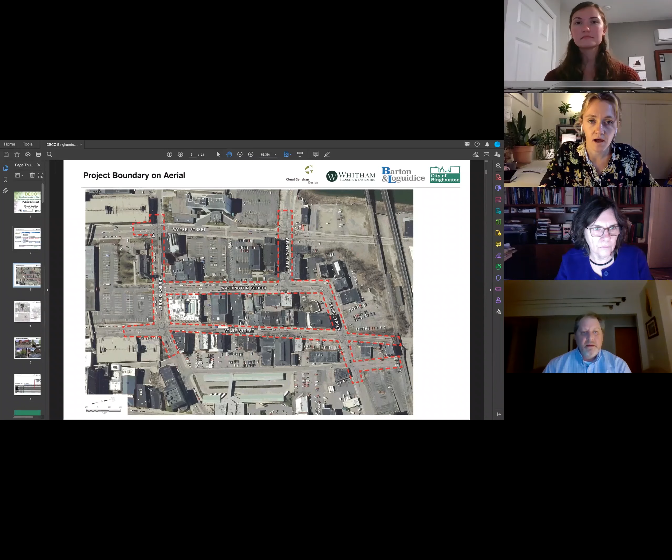So this diagram here shows the general project boundary. It's an area of downtown, and as we look at some of the diagrams that talk about the DECO district funding, it's really focused on the Forum as an anchor arts institution. This map shows where we're focusing our designs within the city street rights of way on State, Washington, Henry, a bit of Water, Clinton, Lewis, and Lewis Street, and Prospect Ave. So this gives you an idea of where these ideas are focused in plan view.

As we mentioned about the Greater Binghamton Fund, a bit of background is that in 2018 the state announced a funding opportunity for the Greater Binghamton area specifically. At that time, WPD helped prepare a lot of the planning documents. As we know, many of the arts organizations in the Greater Binghamton area are based in downtown Binghamton. There's also a wonderful scene that has evolved over the years with restaurants and other great initiatives happening downtown, so we're focused around the Forum area as a major arts institution.

During that time, a lot of ideas started to float around. We developed a number of graphics that caught people's attention. We worked closely with a lot of the project stakeholders, with the Forum and others. We had a stakeholder meeting then, and it led ultimately to a successful funding application.

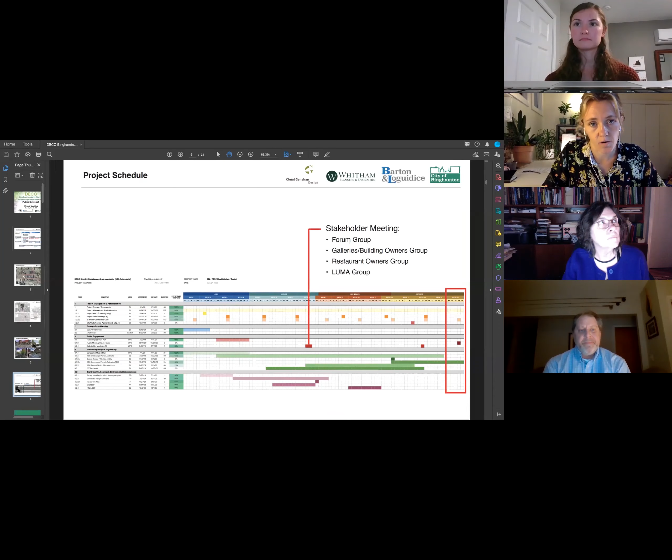For this project, we are at the end of our 4-month schematic design phase. This is an overview of where we've been since July of this year. Midway through, we had a few stakeholder workshops with the Forum again, a lot of the restaurant owners, the gallery and building owners in the district, as well as LUMA, to talk about where our ideas should go. And that was before we put out the survey for all of you to respond to.

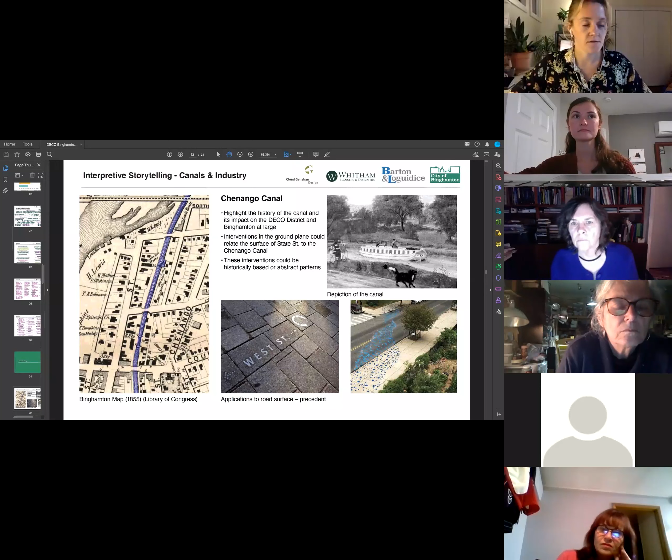A little bit more about that. There used to be a canal on State Street that was later filled. So a lot of history there.

So the next several slides will dive into the details of these plans, and we'll start from the ground up.

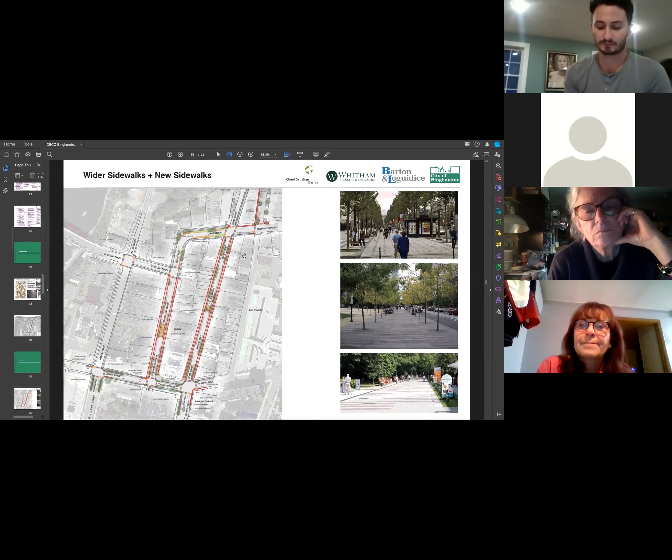One of the fundamental things we're thinking about is creating more public space in the district, by widening sidewalks and adding sidewalks within the street rights of way. This strategy is employed on the State Street and Washington Street corridors, and there's a new sidewalk added on Prospect Ave. All of this allows for the many uses public space can have and enhances walkability throughout the district, so events like First Friday and many others would be much enhanced by having more outdoor space.

Thinking about the gateways themselves and the curb bump outs, as well as the painted crosswalks. Curb bump outs help calm traffic and announce that you've arrived in the district, so we're narrowing the street at those intersections where we can. For the crosswalks, we're painting in between the lines with a color palette that will be cohesive throughout the district, so these artful elements will tell you that you've arrived at this place.

Thinking about traffic calming even more, we have two mid-block crossings that are raised curbs, raised crossings, so there will be a slight bump as a car goes along, which reinforces the idea of slowing down. But for pedestrians, it'll be at the same elevation as the sidewalk, so the crossing itself will feel more like a plaza to get you from one side of the street to the other.

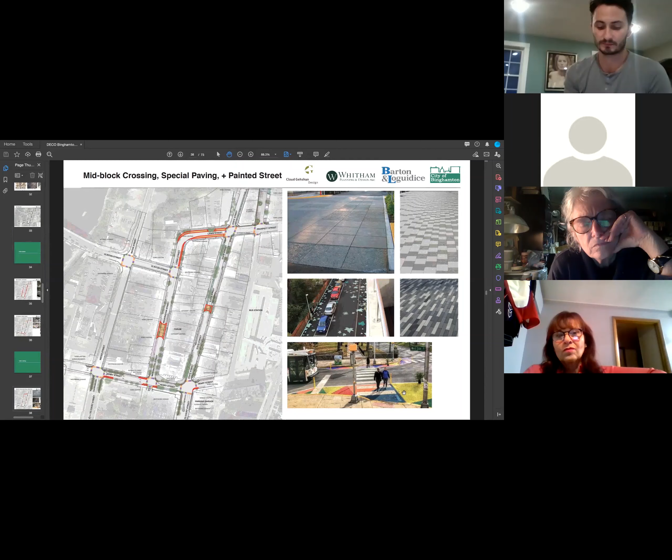And thinking about some special paving at the curb bump outs near the mid-block crossings.

There are a number of strategies for public plantings, the most significant of which are new street trees in the district. During one of our first site visits, we were joking as landscape architects that there's only about 10 trees in this district. Then we counted, and there are only about 10 trees in the district. So this design calls for a diversity of tree species, in case any blight might happen, so it doesn't knock out all of the trees. It's a really good way to think about the ecology of the city.

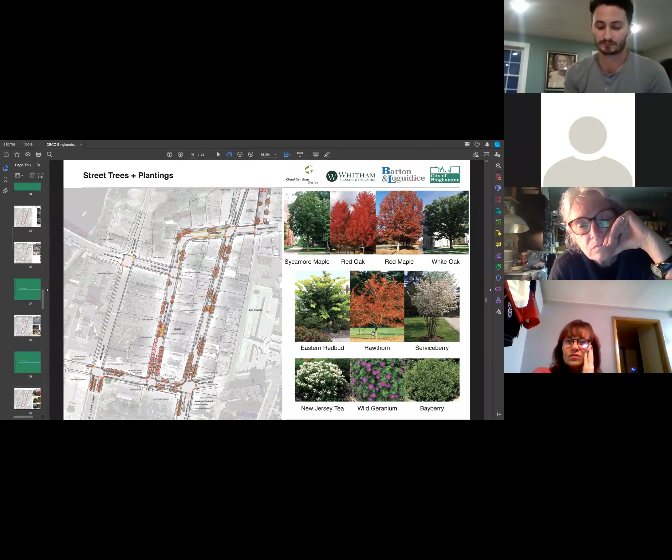So we have these canopy trees that are shown here, and smaller trees where there are overhead wires or in between, that are more ornamental. Some, like hawthorn, retain their berries and look nice during the winter. We also have shrubs, flowers, and other perennials in some spaces.

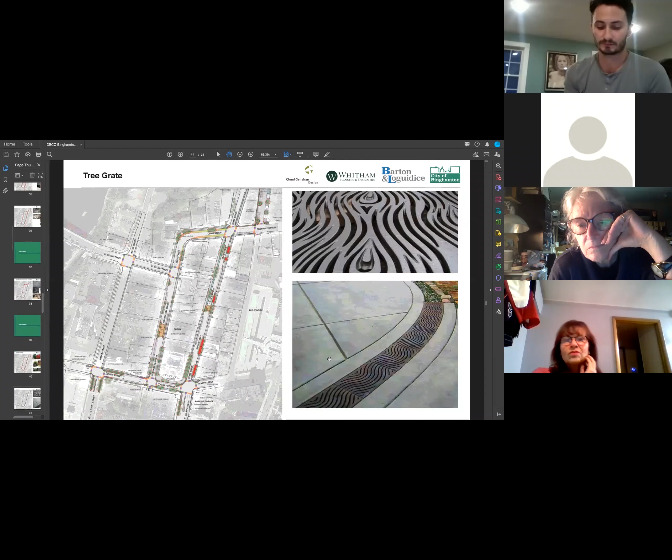For the tree grates on State Street, for those same street trees, we're thinking about this water pattern that visually recalls the idea of the canal on State Street and also celebrates the idea of infrastructure.

Another way we're doing that, and we're still figuring out the exact locations of the green infrastructure, but on the State Street corridor in particular, we're thinking about how we can do green infrastructure plantings that will help with stormwater and bring a lot of green and visual interest throughout the year. Plantings between cars and pedestrian areas help with safety, and we've got a number of species that look good throughout the year and relate to the color palette, with oranges and purples as well as greens for a cohesive palette.

One more point on this: we also have some green infrastructure on Henry Street here, as well as Prospect Ave, going down toward the railroad tracks.

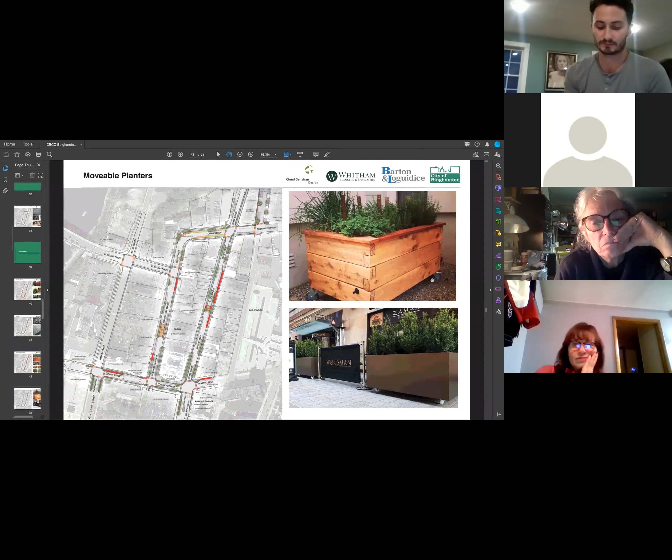Movable planters are a strategy that's easy to do. We've seen some already in the district. As seen here, they can be on casters, so they can be moved in place when we need them. We're thinking about restaurant owners, building owners, gallery owners as potential sponsors of these, creating a network of movable planters that can be moved out to claim a parking space or two for an event, then moved back during winter or when the event has passed. We're thinking about wood or metal for those materials.

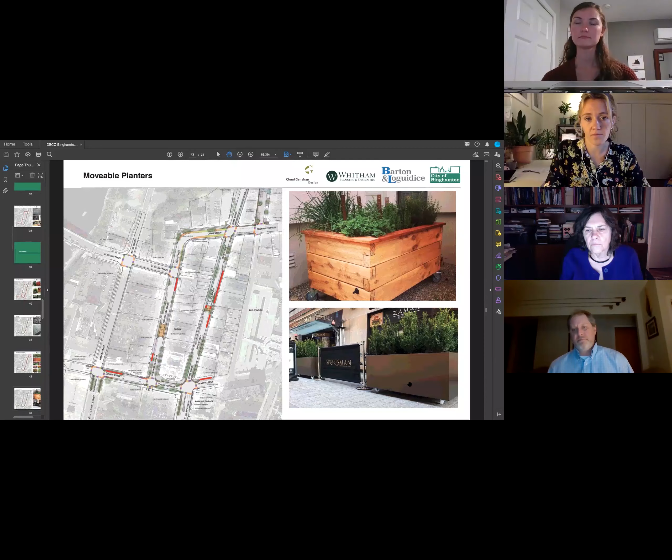Furnishings in the district—they're so small in the plans, so these are blow-ups—but the outdoor benches are focused on the southern side of this segment of Washington Street near the Forum entrance and the intersection with Henry Street, as well as the State Street area in the middle of the street and the north side.

These benches are the same product being used on the Washington Street Mall that's being redesigned and will be constructed soon, which helps lend a cohesive furnishing palette with the rest of downtown. It comes in these hot, beautiful colors, and there are a lot of different ways we can configure them, with backrests or armrests that are comfortable, and we can use these angles to put them together, which creates nice little pockets for conversation.

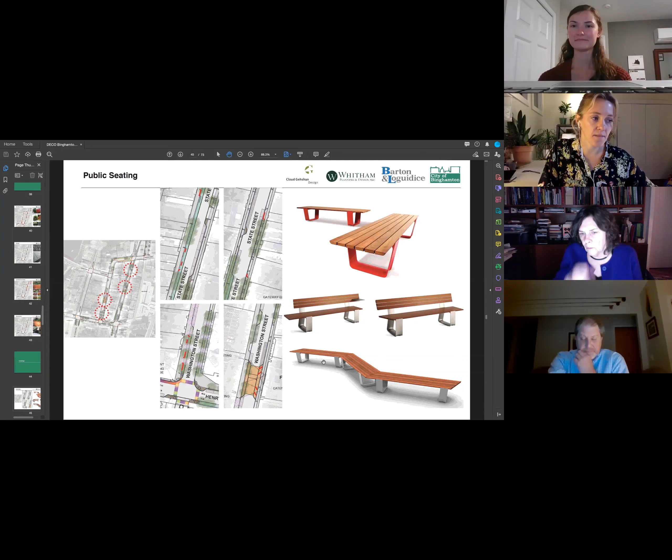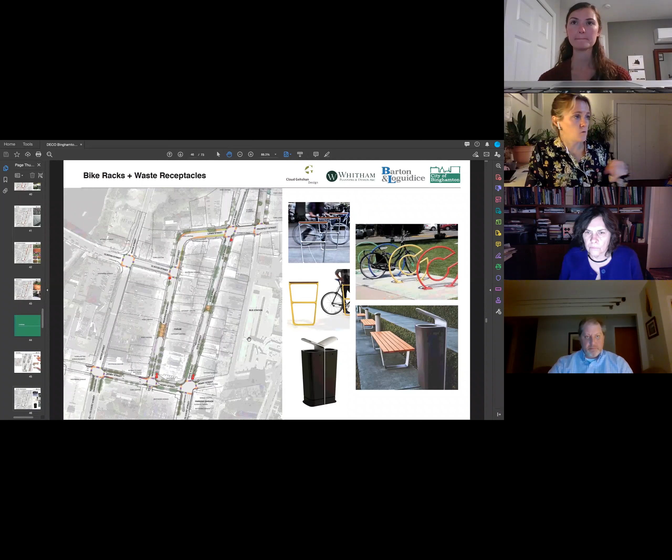Thinking about bike racks and waste receptacles, we will have a sharrow on both sides of the street on Henry Street to connect to the Riverwalk. We're planning for bike racks at Washington and State Street there—again, these relate to the benches. And there will be waste receptacles throughout the district to help with maintenance and other concerns.

So that's kind of building this from the ground up, from a public space and more landscape perspective. And I'll hand it off to Cloud Gehshan to talk about some of the branding and other elements in the design.

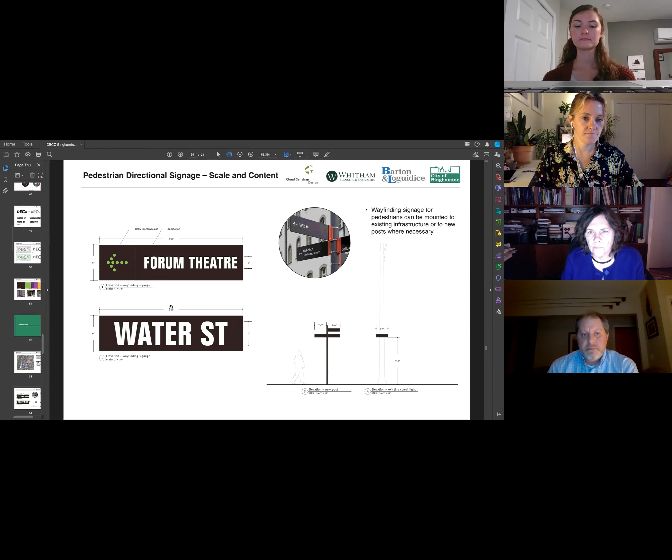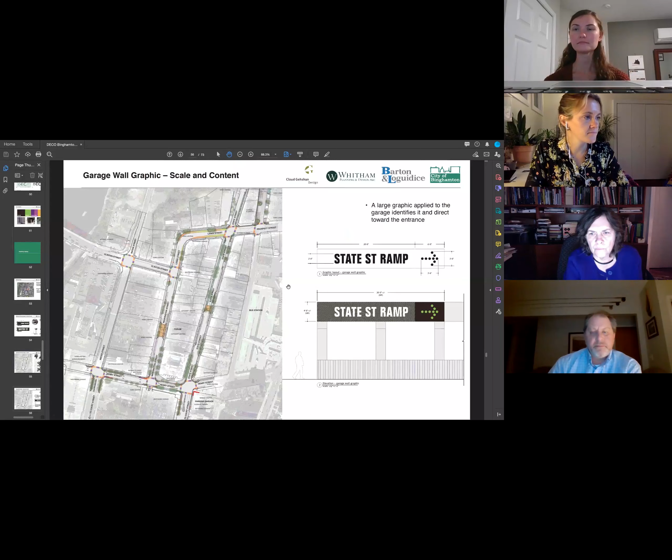We're also thinking about how we can identify parking in maybe an elevated way. So what you're seeing here on the right is a larger graphic that could be applied to the parking structure on State Street, continuing the design language of the other signage.

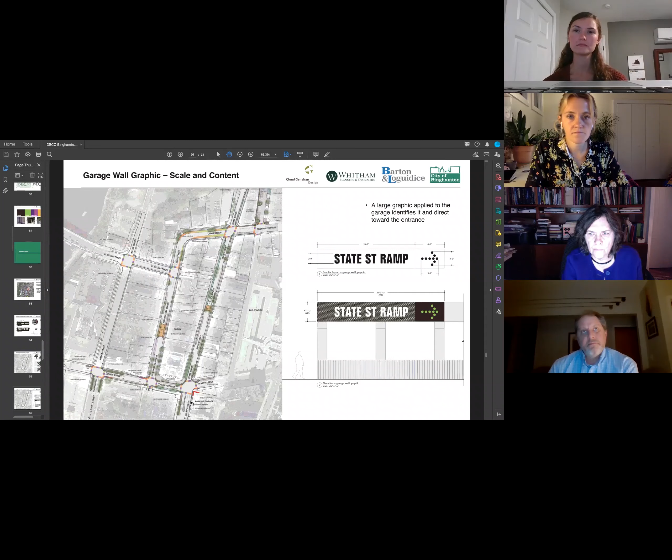Moving into what we call gateway elements. What we mean by gateway is something that lets the visitor know that they've arrived in this district in maybe a more elevated way.

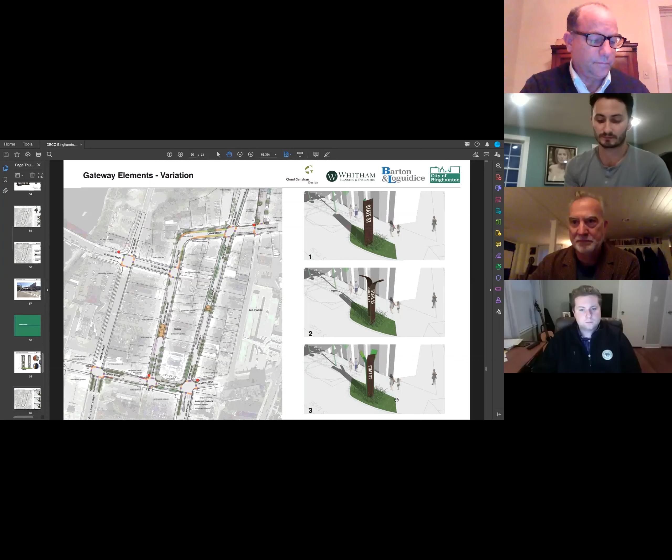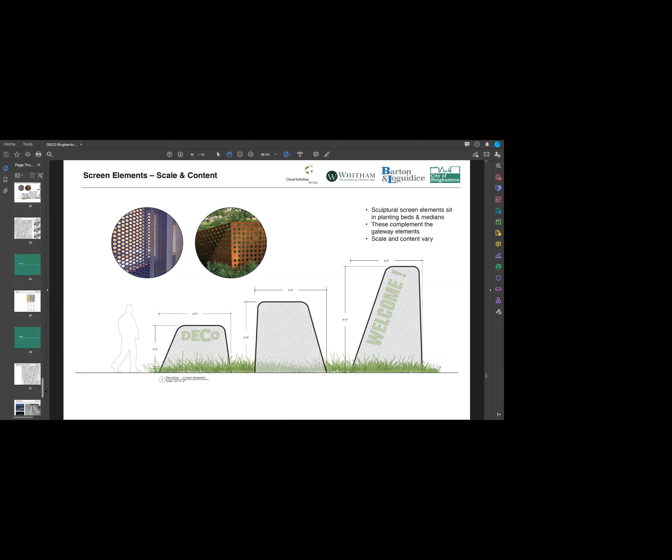We're also thinking about some smaller elements which could complement the gateway pieces we just showed, and we're calling these screen elements. These are things that vary in scale, although smaller than the gateways, and they could carry a variety of messages.

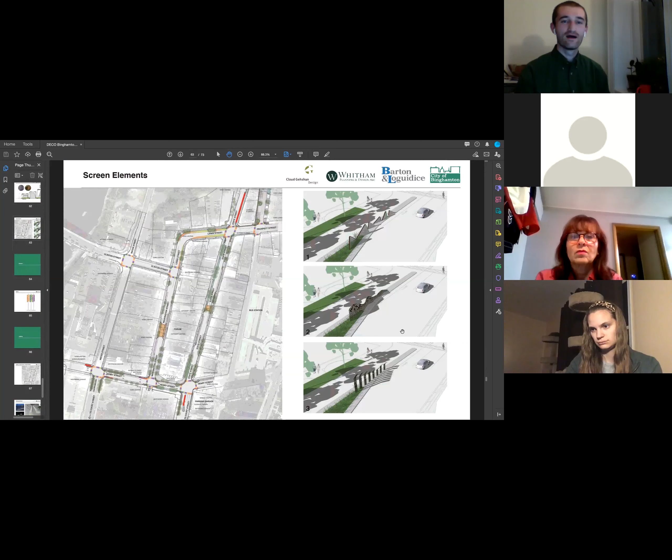They could say welcome, or welcome to DECO, or could continue the street name language. We highlighted some locations, particularly the beginning and end of State Street. On the right, you're seeing the existing median at State and Henry, and an implementation within the median there, which in our opinion is an underutilized space where some of these more interesting sculptural elements could go.

A few different strategies of how that could be implemented: they could be organic and playful, or they could become more geometric. But it's all about creating this gateway experience, so if you're driving past something like this, it's something that could catch your attention pretty easily.

Within signage, we're also thinking about banners. There are a lot of existing streetlights on State Street in particular that could carry some kind of changeable banner, so you could put up these colorful, eye-catching banners to let people know they've entered this part of town. These could also be geared towards events, but we're carrying the design language through to all these different kinds of pieces.

The final component we were thinking about when it comes to brand and signage is lighting. We touched on this earlier, but we're going to circle back to it now.

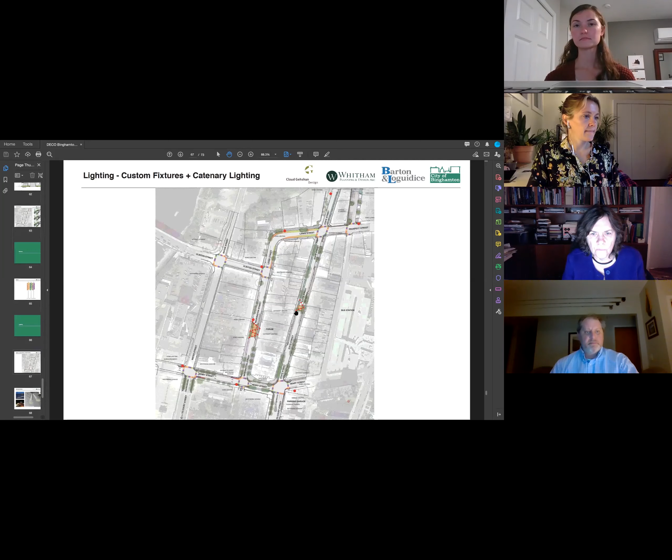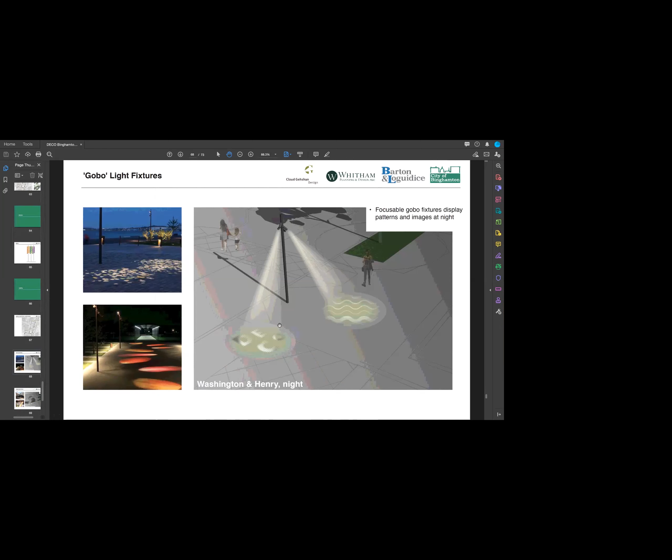We thought about a few different kinds of light fixtures that we could locate within the district: a few standalone, which you can see as singular red dots, and some overhead catenary lighting within central spaces, like across the street from the Forum, or within the central space on State Street. These standalone fixtures are what's referred to as gobo fixtures, which are essentially focusable light fixtures that can carry pattern and image.

So you're seeing this particular fixture casting light down, but also displaying the DECO name, or it could be a little more ambient, like a pattern resembling water. There are some example images on the left that give you a greater idea; this could be colorful or these ambient patterns. What's interesting is that you have the ability to change the image periodically, so if the city wanted to display a particular graphic during a specific time of year, you could change the image piece while the fixture stays in place.

This could also be something local artists participate in if they become engaged, and they could create custom graphics for these things that could begin to animate the street.

And then the catenary overhead lighting I was referring to earlier, in concert with these other fixtures. We're showing here the Forum Theater on Washington, so these fixtures could be suspended over the street and really begin to animate the space at night. This is great for a variety of reasons, like safety—it could potentially make this safer, but it also creates a sense of public space, that this area is really for everyone.

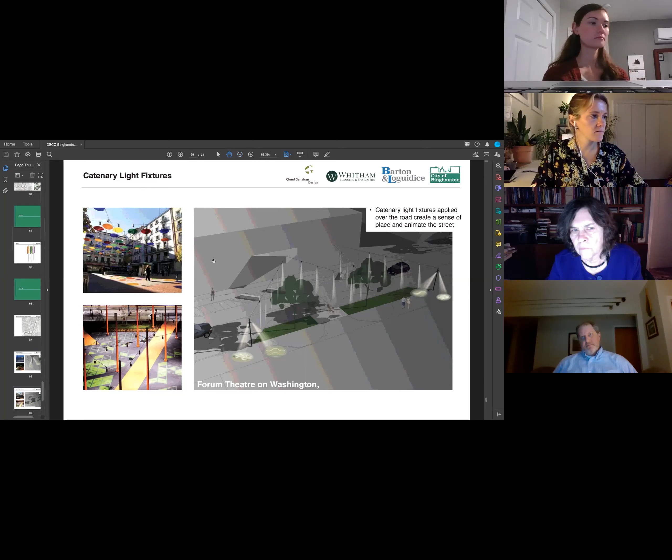So that was a lot of information we just shared, but we thought it was wonderful to see how there are parallels between what we're hearing from the public and how our design thinking has evolved to date. As we've said, it will continue to evolve as we work with the city and continue to think about what we're hearing. We've really thought about this environment as a whole.

So many of the strategies you saw tonight are at a large scale and a small scale, but as a whole they aggregate to a unified, cohesive, readily identifiable, unique district that is connected to the rest of downtown. We hope this becomes a really wonderful part of downtown Binghamton, and we're really looking forward to keeping going with our design process.

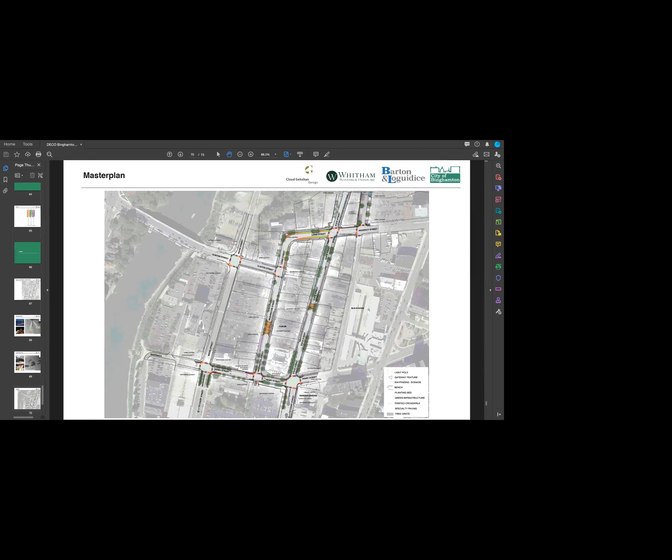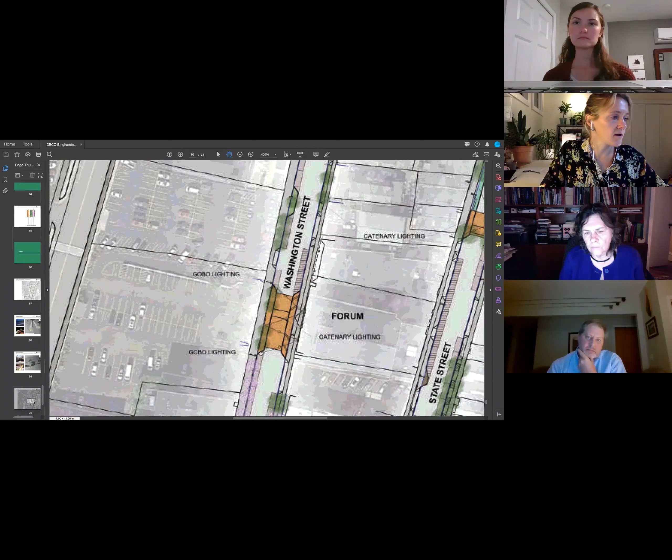There is one question in the chat that asks us to talk a little bit more about the experience in front of the forum. So I'll zoom into that area in the plan. This has curb bump outs on either side of Washington Street, and it allows for a drop-off zone in front of the theater so that people are still able to be dropped off, but it creates more of a plaza near the historic, stylized marquee that the forum has. So there's seating there, there's catenary lighting in front, and there's ornamental trees across the street.

Maybe before we move into a whole group discussion, we could talk a little bit more about next steps so that it's clear where we're going from here. I might have jumped the gun a little bit.

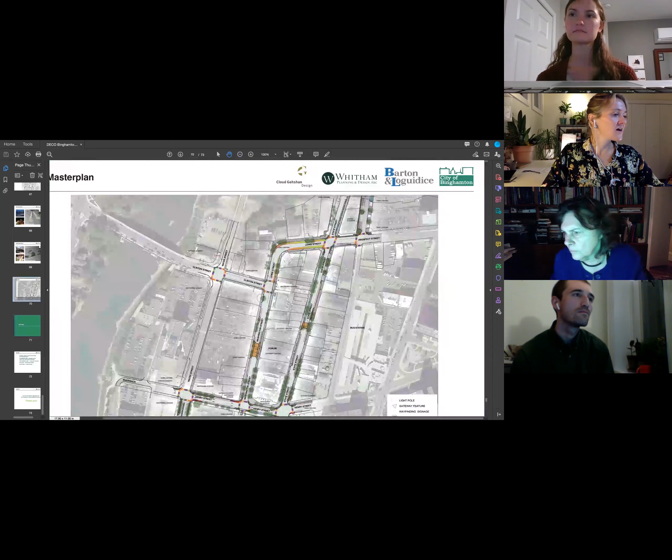Kate? I had a question regarding the State Street garage. It's definitely a neo-Stalinist, brutalist structure on its best day, that's when the sun's out. But just putting a sign on it seems a little bit lacking. If we can put some lipstick on that, as my chat item had it, pretty it up a little bit. And hopefully it'd be something that could be detached, so in the next garage that replaces it in the probably not too distant future. So if it's a great piece of art, we're not going to lose it for posterity, but that's something that could be attached in that process.

Any thoughts? Our thought basically was to focus on the streetscape outside of it, because we know that might change, as you alluded to. There's no definite timeline for when that will be. We just wanted to do what we thought was the priority of making it really obvious where to park to go to galleries and the forum.

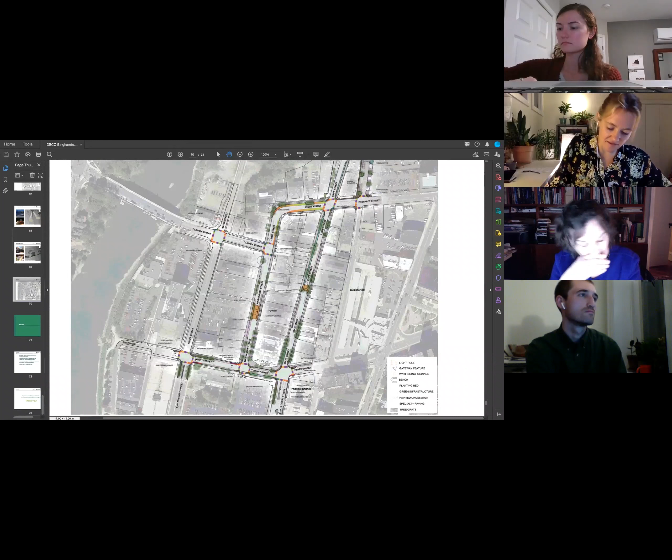The one thing I thought though is an opportunity, if you were going to put some, I'm not talking about painting on it, but something you could drill into, some kind of metal sculpture or something, even something kinetic, that would be of interest visually, but that could be attached to the next garage or whatever structure gets located there. But just, I think it's a great idea.

Ugly building that, yeah, I've got a hating for it. We think that's a great idea. I mean, it's really similar to some of the things we were talking about early on. So we'll keep thinking about this.

And I take it the lateral park went away? From the one that was going to connect from State Street over to Washington? The Bob Crow parcel, I think. Yeah, so that is still privately owned, so it's not part of our scope. But as you know, during the Greater Binghamton Fund application, we were well aware of the potential for that.

And then the one other thing is the cartographer in me, I think it says Clinton Street on there, and that's actually East Clinton Street. Oh, good eye. The Bob Crow parcel is basically on hold, and the Clinton Street is mislabeled. So good, East Clinton, yep. Thanks. Don't worry, they made the same mistake on the Clinton Street side, they named that East Clinton Street. Not you guys, somebody else, another project. A common mistake.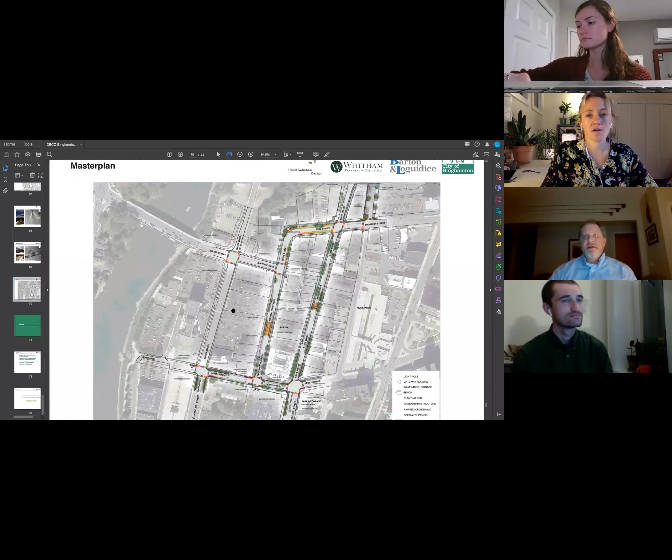Okay. We've had a couple more. Thanks for that overview, Jeff.

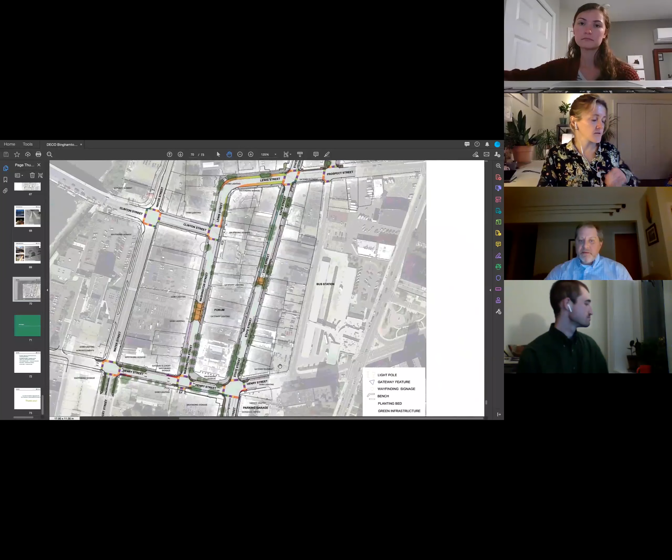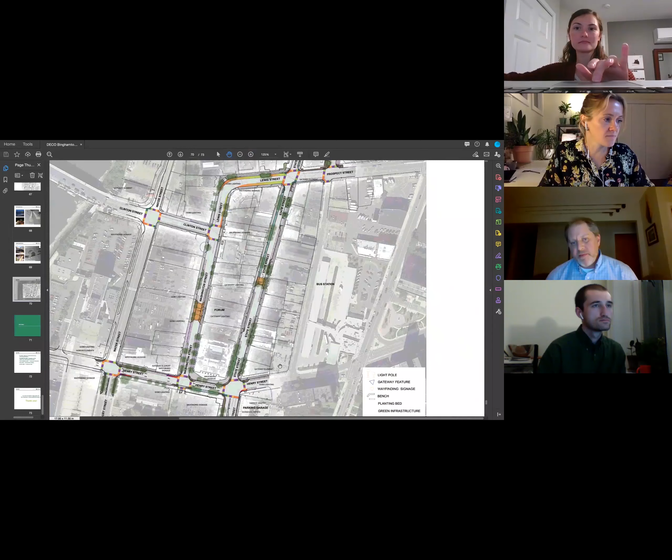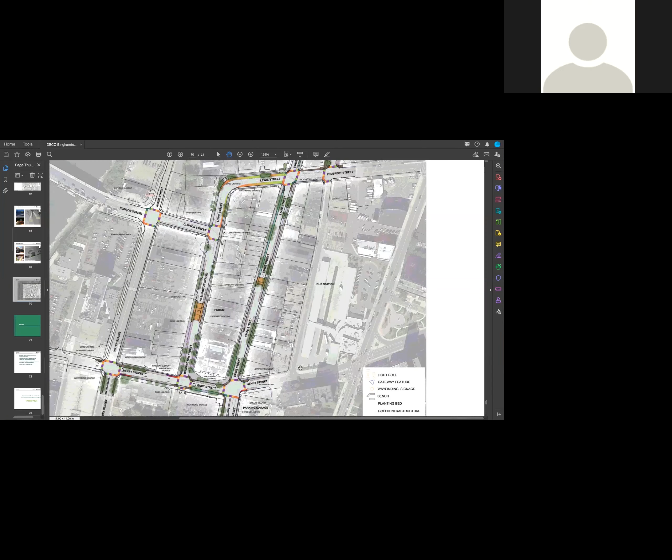Had a couple more comments come up in the chat. The first is about thoughts on extending down Henry Street to the bus station to entice visitors. It was frankly a little bit hard to color within the lines as designers for this project, but the city is aware that there's no real boundary, and we're aware of that too. So we can only plan on these other improvements to the streets. Henry Street, as an example, will just continue to be improved, and it'll all tie in together. But basically, we had to start somewhere, and we do have a budget to work within. So we are hoping that the gateway elements and the wayfinding at that intersection will make it more apparent that the bus station is here. And also these improvements, including this new crosswalk from Prospect Street, will make it easier for people walking from State Street, Lewis Street to cross and go to the bus station.

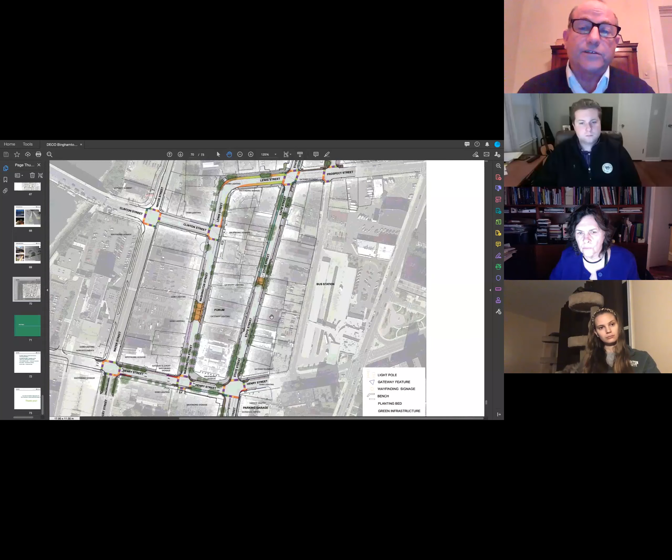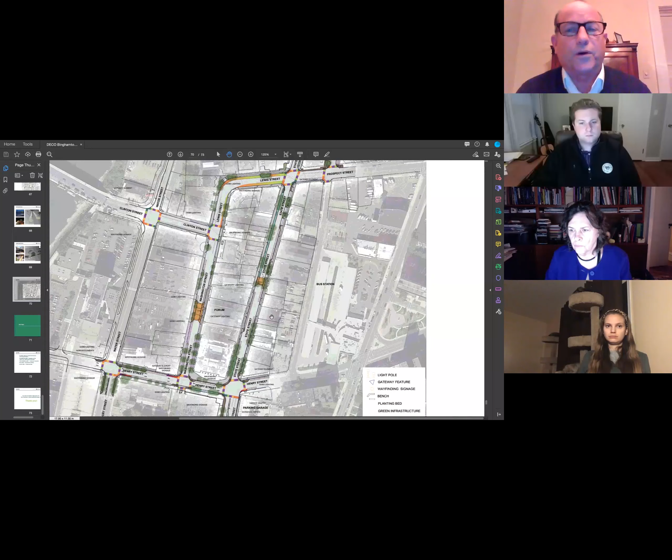Kate, one of the things that was out there, I remember talking to the owner of the parking lot. If you go straight from the bus station, you come off the buses, there's a parking lot. I know the owner of that parking lot was willing to allow a pathway be painted on it. It would be a very small budget item. And that would draw people through the parking lot with Chris's Diner and Brunelli's Gallery and draw them in there. There's also some thoughts about putting murals on both the side of the Brunelli's building and on the side of Chris's Diner. And then with the signage that would draw people from the bus station into it, rather than putting them on Henry Street, which is not the scenic zone of the city of Binghamton. So if you could draw them straight into it - I think that was part of the original design, I don't know where it went, but it seems an inexpensive way of doing it. And I know the owner of the parking lot was very willing, as a supporter of the arts. It's Tom, the owner of Atomic Tom's.

Yeah, I think we're going to have to continue coordinating with a lot of private owners. But if I can help, I did a lot of footwork on that. So if I can help, don't be shy.

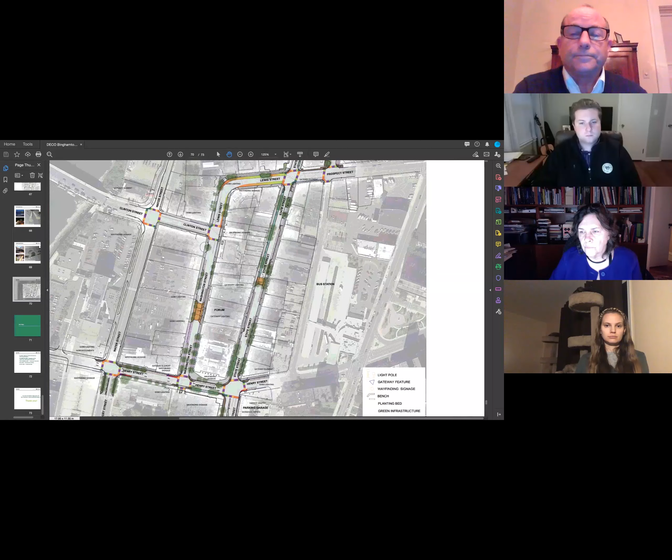And the idea about the murals - there is a parallel effort that the county is doing right now for all the murals that are funded by the Greater Binghamton Fund. That covers all three municipalities: Binghamton, Johnson City, Endicott. From what I understand, the county's done so far is have a call for private owners to express their interest in having a mural on their property. I'm not totally sure of the status of that. I would strongly encourage - I don't know what the contact has been there, but that's a great place to do it, and you'd be drawing people into the art district. Highly encourage anyone to talk directly to the county about the murals. But as we've been talking with them, Stephanie and others, we know that these will work in concert with each other, and the murals are really going to help set the tone for this area.

Also, everyone mentioned that Instagrammable moments, and we were thinking like this public art outreach program of murals in the designs for the crosswalks or the bump outs would be opportunities.

Those murals can become opportunities for people to stop and take pictures. I'm also pretty sure Brunelli has funding in place for his own mural project. I know he had an application, but I don't know where that stands.

There is some county funding slated for, I believe, 186 State Street, and we're working with the property owner. We have to work out a lot of details, but that's definitely a potential mural location given everything works out. We also have a few other interested property owners in the DECO district, a couple on State Street and Prospect Street. We're trying to finalize those details and solidify interest, but yes, this area will be a concentration of public art through our project and through the city of Binghamton's efforts as well.

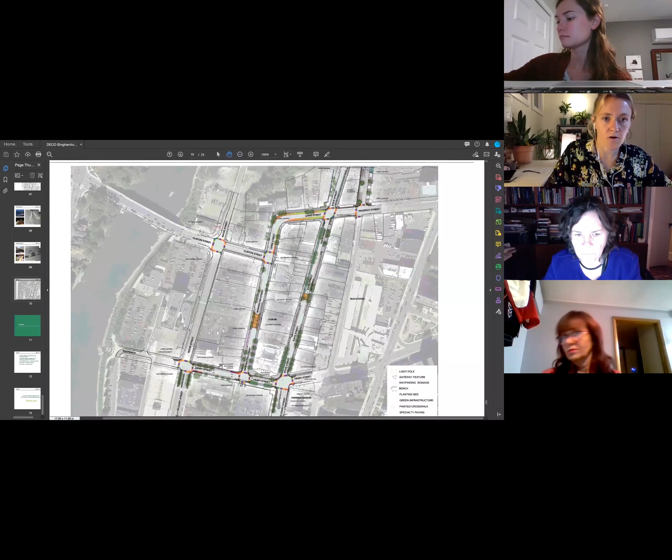How bike friendly is this going to be? Are there going to be racks and bike lanes? Yeah, there's some racks in there, I think on Washington and State. On Henry Street we're looking at adding a shared use symbol, called a sharrow. There's no dedicated bike lane, but given the width, some of the parking, and the short blocks, the traffic's already pretty calm, and it's kind of a direct connection right to the Greenway.

Jeff, I can tell you I have witnesses that I'm probably one of the biggest bike riders around, even though I don't look like it.

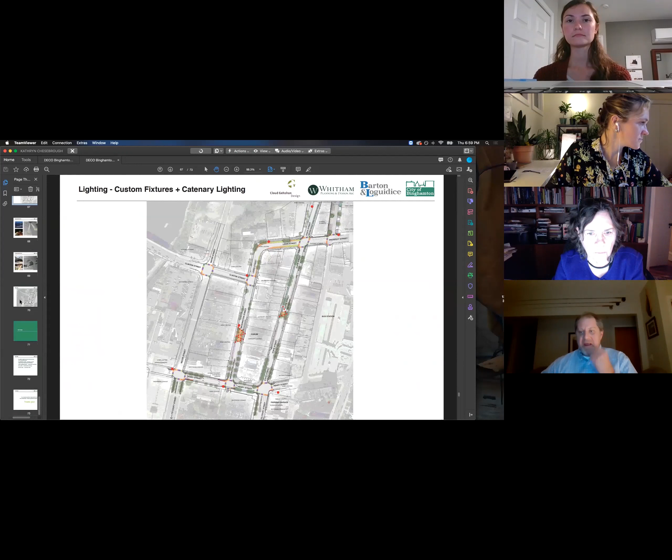It's fair to say those shared lanes are very poorly understood by most people, especially when they're driving cars, and especially when there's snow pushing you out, or ice, or an uneven sewer entrance, making it a little more sporty than I'd want my kids doing. I do it myself because I have a death wish, but those shared use things—there's one right now on State Street by City Hall that makes zero sense to me, and that's coming from someone who's ridden a bicycle in downtown Binghamton.

Yeah, they're not appropriate everywhere. If we have adequate width, especially with parking, some street trees, and short blocks, it really tends to slow things down. So we don't think there's a lot of traffic or high speeds between something like State and Washington, or Washington and Water—it's pretty calm there. The only thing is, if you have people biking at night with the bars open and people driving, you're designing to a scenario that doesn't exist.

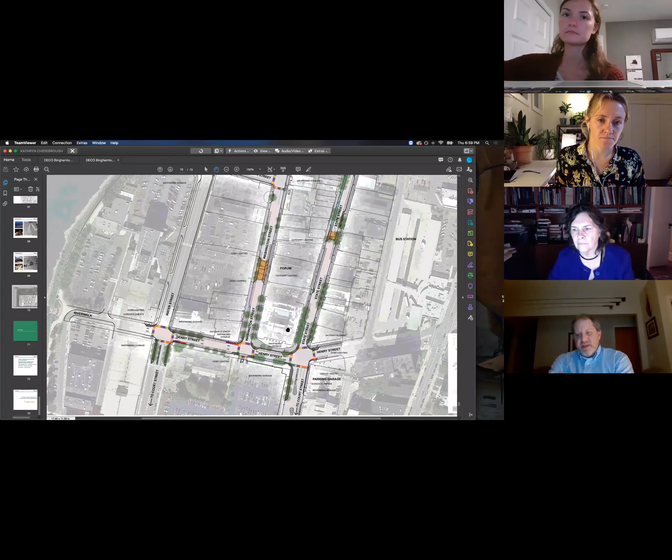If we wanted to explore dedicated bike lanes, we'd probably have to remove parking. So it's always a balance—if parking is important on Henry, there are some spaces we're retaining there. Clinton Street is a little more difficult, since it's a high volume intersection with no room to add anything, but there is a bike lane heading east that we're going to keep, connecting the Greenway heading east into the district.

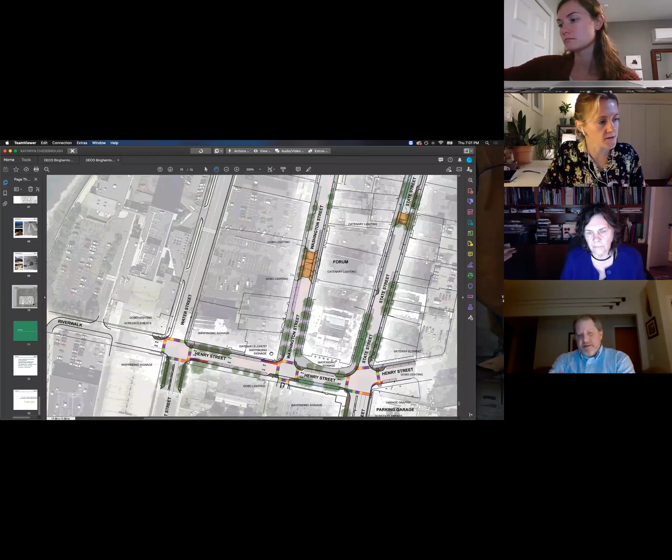Another element in terms of multimodal is a direct connection from the Riverwalk, a short on-street section, then you're at the bus station—so if you rely on public transportation, that's a pretty convenient connection. Truth be told, a lot of this design is hopefully going to build new habits for drivers, walkers, everybody.

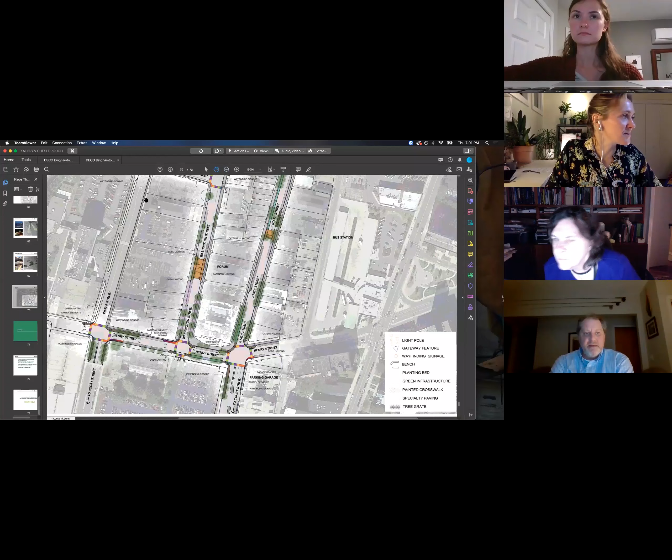Apologies, a second ago everyone had to see my messy computer screen, but I wanted to get a higher resolution drawing so we could do these zoom-ins. No judgment, no judgment—you should see mine.

There was a question in the chat about why DECO. It's a really great question, actually. The name DECO is an acronym that stands for the Downtown Entertainment and Cultural Organizations District. That doesn't exactly roll off the tongue by itself, so we thought DECO was a punchy name.

However, as you can see in some of the branding that Barb and Branson were presenting, DECO is sort of an underbrand to the street name itself or the overall area itself. So we made the choice to not let that overshadow anything. It's there if you want it to be there, but the names of the streets and the place itself are the priority.

It's also why in our public outreach efforts we've been calling this the Downtown Binghamton Arts District. We know it's not the only place in downtown where there is arts—there's the KNOW Theatre, Washington Street south of the Metro Center, the Court Street area, the whole spread of downtown. But that's a little bit about the name and the brand. So it's DECO, it's there, it has a uniqueness about it, but it's not front and center. Hopefully that's clear.

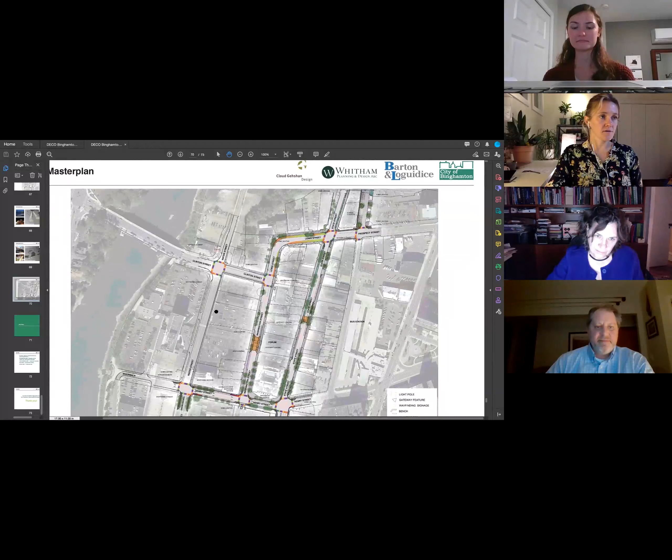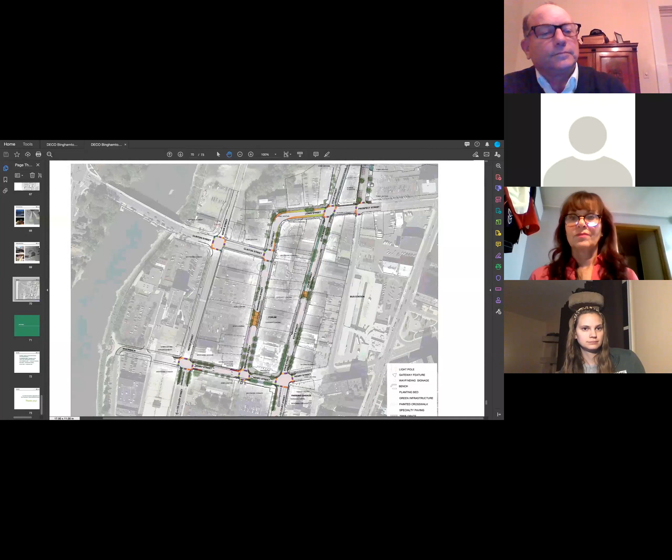I'll just go back to the plan. All right, can't see up at the top. The railroad is at the very top. No, I think there's some trees along there that we can't really see. Oh, that is the top.

Do I hear people talking about an area they want to be zoomed in on? Would you mind zooming in on Prospect Street? Sure. We have a real traffic rodeo going on up there now.

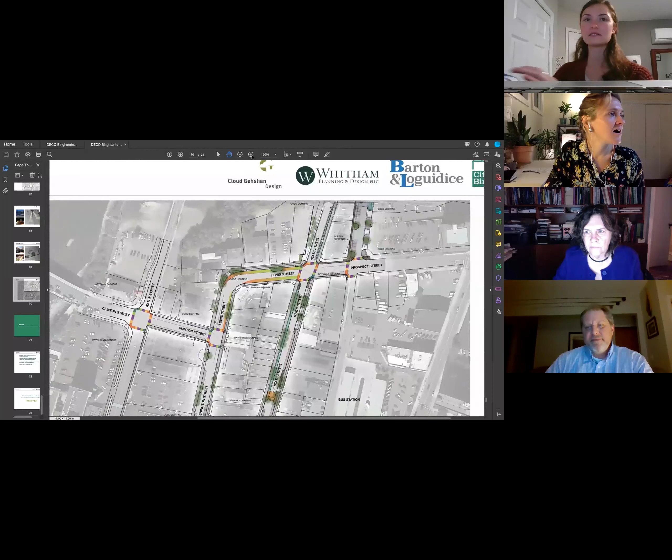On Prospect Street there's a really wide street right-of-way, and as we know, there's no sidewalk there today and there is a bit of a traffic rodeo. So what's proposed here is a new sidewalk that will continue to allow Firestone to park their customers in front. It'll be a mountable curb, but a new sidewalk will go all the way to the end of the street. Tree plantings will be of an appropriate height underneath the overhead wires.

These are all green infrastructure elements, so they'll soak up the water that pools in this area. There's on-street parking both for Firestone and for 61 Prospect, so it's more defined in this plan than it is today.

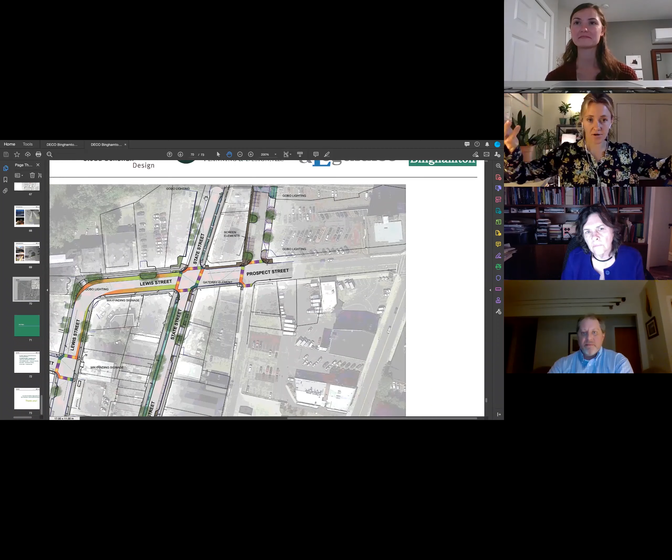On the other side of the street, just to recall some of the things we heard in the survey about the lighting and the bridge—we have an active railroad line on this end of the DECO district, so we're calling for lighting that will light up the underside of the bridge. That industrial character, which is actually quite beautiful today, will be highlighted, with contemporary light fixtures that highlight it as a true gateway for that area.

We didn't spend a lot of time talking about Lewis Street as yet. This calls for supplementing some of the existing plantings that are there, visually narrowing the street with paint to help calm some of the traffic. Each of these gateway areas again have the painted intersections.

As we come to Clinton Street, there's that GoBo special lighting fixture at this intersection—a gateway feature that Branson showed, these 14-foot tall pieces right when you get off of the Clinton Street Bridge. There's also wayfinding signage on the back of the church.

Just to echo what Bob was saying, I think those are great improvements for Prospect Street up there, but I think a continuation of those would be much welcome further south, across from the bus station, right in that area where there's no sidewalk and it's pretty much just an open driveway for that parking lot. I think it would be great, maybe not through this project, but to keep in mind and put that on the record.

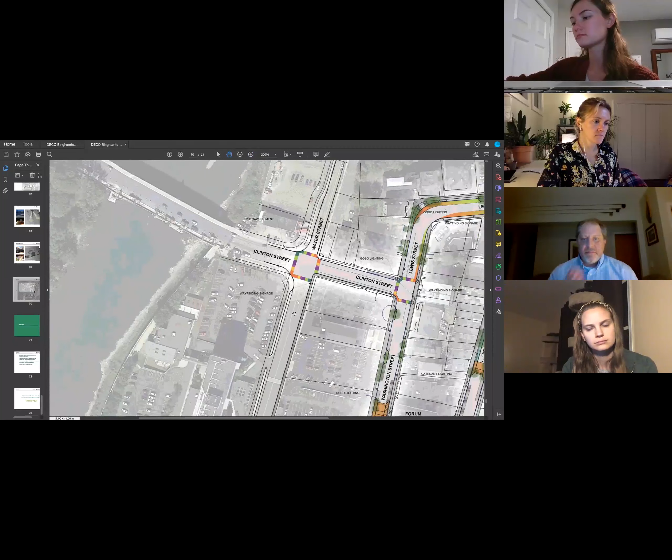This project helps us plan for other city projects in the future, so that connection is pretty clear long term. While Stephanie's here, it might be good to embed signage on the back of the forum, like DECO district, so people see it coming off the bus. It's very visible from the garage, and there's a pathway inside the intermodal facility that points you right to it, but it just dumps you off on Prospect Street. If you've been there, it's screaming to do it.

These are good points. Another thing to consider—you mentioned creating more public space, more gathering space—just make sure those spaces are equipped with electric or other infrastructure to allow food trucks or a small musical performance or something like that. That's a great point, Stephanie.

Because the lighting on State Street, where we did the first year of Luma, it's very low amperage. If the street is going to be opened up, I'd want a much more robust electrical system in there. I'm glad Stephanie said that—that's why she's a planner—because that really was a real limitation in being able to put on events there.

Even with Luma, you'd put in a popcorn popper and the element that heats the oil would blow the fuse. As we think about these lighting fixtures that Cloud and team have put together, we'll absolutely be confronting voltage issues in the area, so we'll have to wrap this all in.

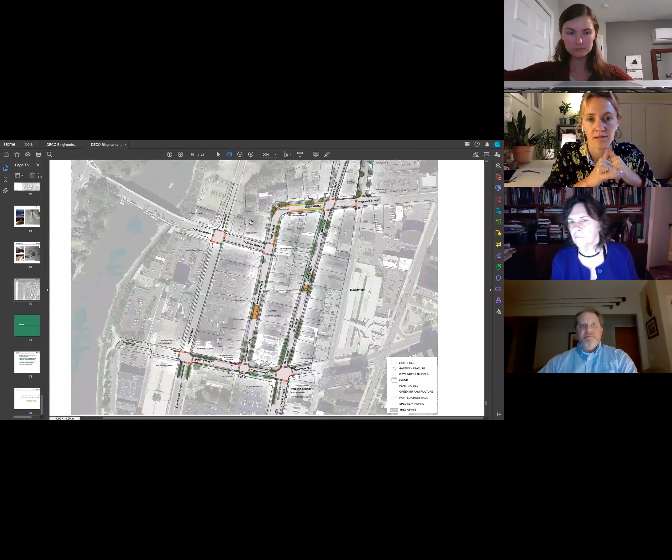Speaking of the pandemic, it really has highlighted the importance of public space, not only in Binghamton but everywhere. It's really been a savior for all of us to be able to go outside and enjoy our cities and our local community.

I think we're going to keep the meeting open a little longer, but we've covered most of the material we had for tonight. Again, these will be posted—you can send them to your networks—and hopefully the survey results and these designs to date help inspire and inform everyone about what this project is doing, as well as what others might be able to do as well.

Quick question—has BMTS, on the bike side of things, been looped in? Not yet on the bike side—we've coordinated with them on the bus routes right now. It might be a good idea; they've had some good ideas as far as bike paths go.

That are actually functional. I'm not a big fan of the way it's being presented on the bike side. If you want to make it a more walkable, rideable city, instead of just being stuck in the 50s, we want to get out of the 50s and into at least the 20s. So how do we get there? The only thing we've looked at with BMTS is their actual route map right now—there are a lot of streets.

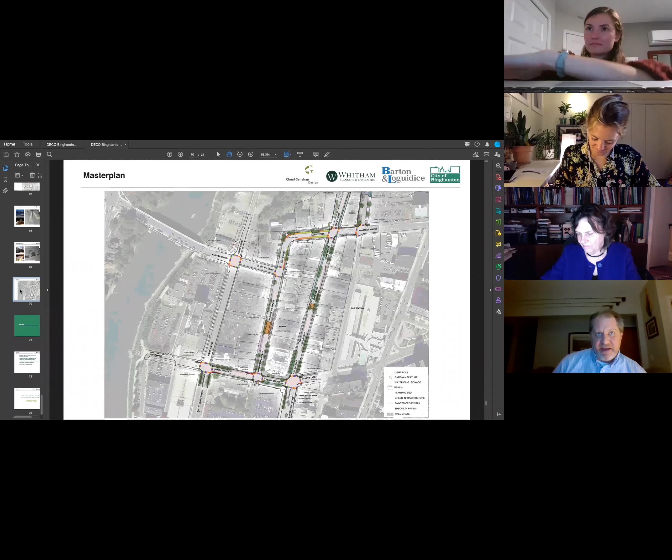There's always a debate on this - some cyclists feel more comfortable moving with traffic and using the street lights and following the traffic laws, and some like a separated system, but some folks think that makes people feel too safe. I mean, I like dedicated lanes myself, at least.

Do you ride a bike often in the city? Not in the city, no. Okay, so then... They don't work well, I've heard both sides. I've had engineers tell me that all the time, because they're trying to save space on the road. But at some point you've got to make a decision - if you're going to exclude bicycles, just exclude them. But if you're going to say you're going to do something, it's putting people in a more dangerous situation than if you just left them to their own devices, because people don't obey them.

For those that don't know, what does BMTS stand for? Oh, I think it's Binghamton Metropolitan Transportation Study - it's their local MPO. Something like that, I'm close if I'm not there.

I mean, if there was some additional transportation funding - this is more of a streetscape enhancement and pedestrianization project. Well, bicyclists are people too. Yeah, I know, we're doing what we can to at least link up to the Greenway. As far as a separate facility inside the right of way that we have to work with, that would be difficult.

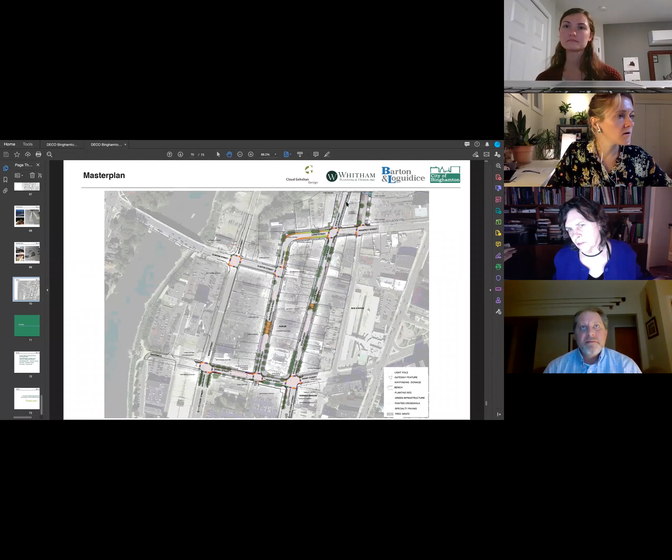You mentioned public art - there were some screens or pieces of art we were thinking of going down State Street towards the bridge, replacing those panels. And then at the end of - is this Clinton? No, that's Clinton over here - Prospect, and up here at the end at the railway station where there's a little green area. Whether we could contact the railroad and have that as a public art piece too on that fence - it's just something we all need to look into more. That's a great idea, that's an excellent idea.

Because I did a lot of that in Syracuse by the railroad crossings, and it looks good - it got a lot of positive attention along the way as a gateway to that district, I can't remember the name of it. It's the West End over there. It took about a year to get the railroad to agree to paint those bridges, but I think they commissioned artists for each side there. I know the New York Susquehanna and Western is a different crossing - Norfolk Southern is not as friendly. The NYS&W was very open to painting on the east side of town.

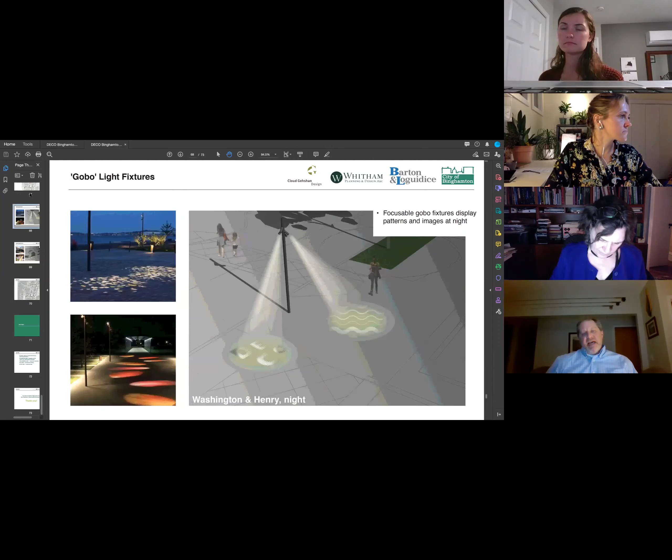Yeah, CSX won't really even talk to you usually. Were there any preferences on the variations of the signage or gateway elements, like the style or architectural configurations of them? I mean, I think there was a few options.

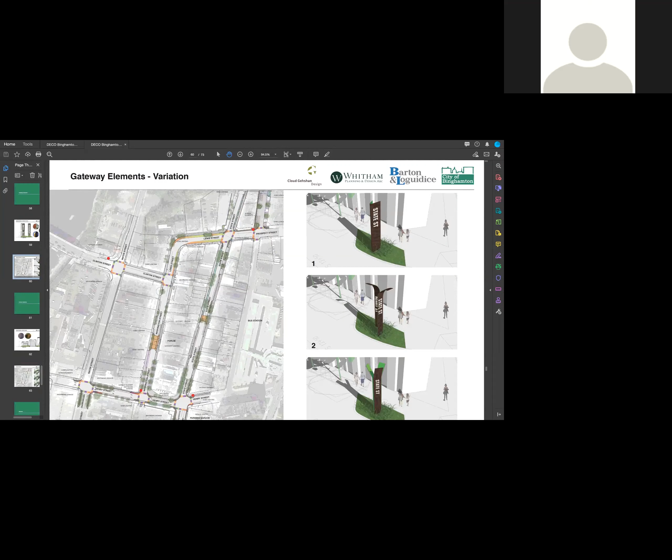Also, the idea of these that I don't think was mentioned is that they're punched metal with an architectural lighting feature, so that the pattern would glow, and we can look at a variety of patterns to integrate into the face of these signs. So behind these could be 3 to 4 lights. This one shows it a little bit more, but we were thinking it could be RGB light so that it relates to the arts district and the color palette some more.

The RGB would be great. So you could design it. I mean, you could program it then.

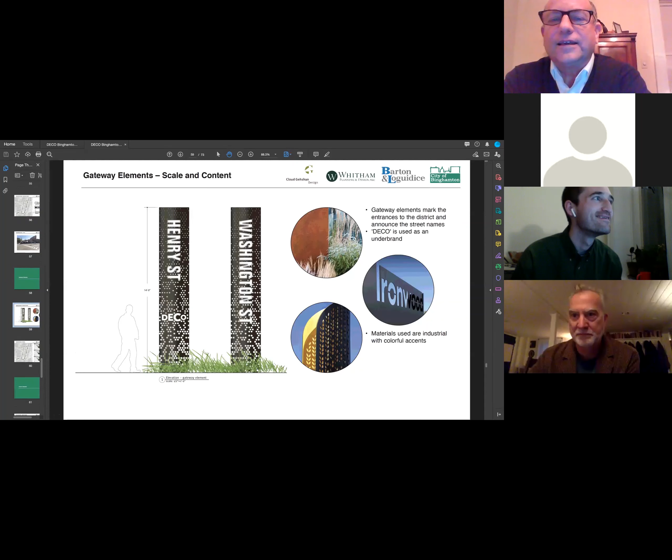Hello? Yes. Can you hear me? We can hear you. No, they can't hear me. We can hear you, yes you can. Who's speaking? I think she just muted herself. Whoever was speaking, would you like to type in your message and we can get you back online?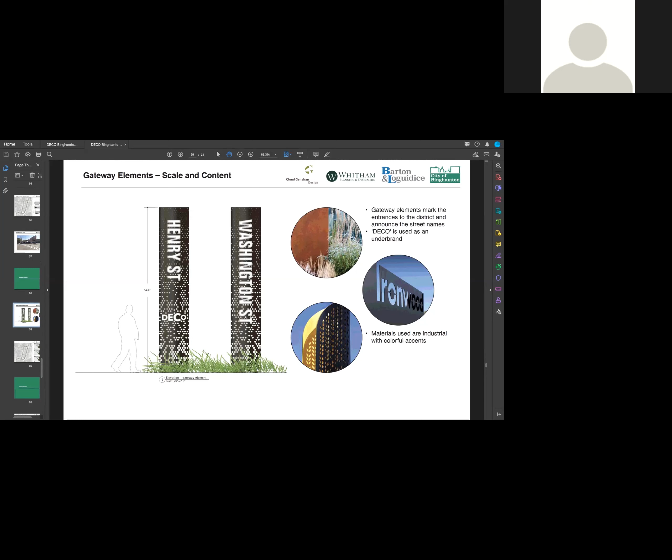Well, if there's an empty space, I'll jump in a little bit. I'm just wondering, is using the Binghamton green as an accent color as well, from place to place?

We thought about that. I think Clark and Branson can speak to this a little more, but that was in this for a while. As we wanted to relate more to the industrial character of Binghamton, the dark green can look institutional sometimes. So we wanted a more industrial tone. So that very dark, almost black brown, was what we were going with.

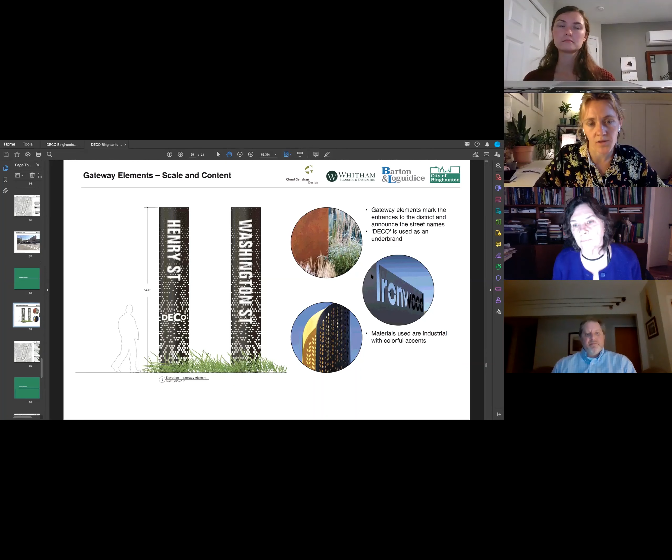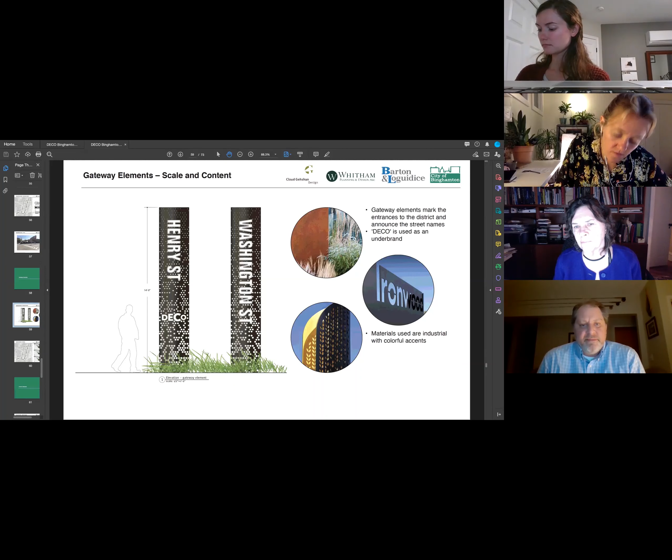I see the industrial to some degree, but what I also see when you're sitting in the middle of the city is the green hills surrounding the city and the number of trees there as well. And it is something that is, again, I'm not from Ithaca or Syracuse, but I'm from Binghamton. It is something that Binghamton, that green has been a color that has carried through in most of our signage, our city flag, et cetera. I'm not saying to have it in all things, but as an accent piece to catch on from time to time.

It is home. It's just like orange is Syracuse. Right, whatever the Pantone number is, and it varies, to be perfectly honest with you. Yeah, but that sounds like bitter experience. I have the same problems. At one point I tried to get the university and the city to merge their Pantone, but I was roundly thrown out of that one. So it will happen someday.

We are going to definitely keep thinking about the color palette and how we apply it. Clark has done so many sketches, it's amazing how these come through, but we're only at the beginning of design.

Wanted to refresh everyone's memory on some of these signage options. So the wayfinding signs, as Branson mentioned, are attached to existing light poles. There's a number of different styles of existing light poles in the district, so one thought was that these wayfinding signs can help unify the district because they would all match. So we've got a few different styles that we're thinking of here. Each of these would relate back to the gateway because we want a cohesive graphic system.

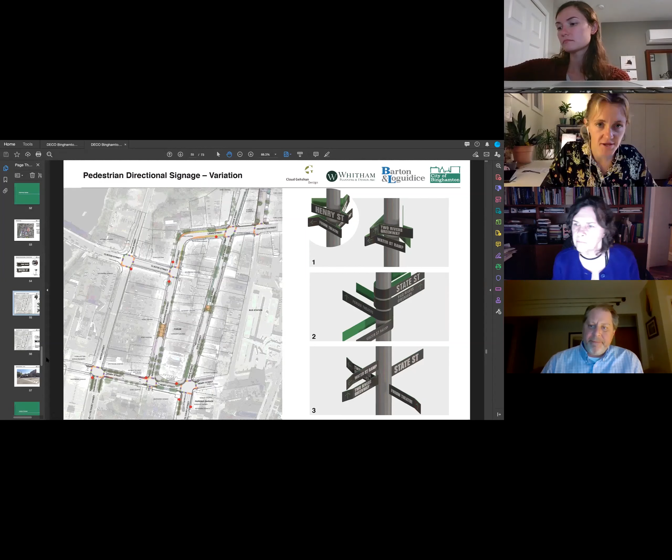So we're just showing you that with the concepts for the gateway elements we can relate the wayfinding to it. If anyone else had something to say, go ahead. Am I on mute still? We can hear you. Oh, you can hear me, good.

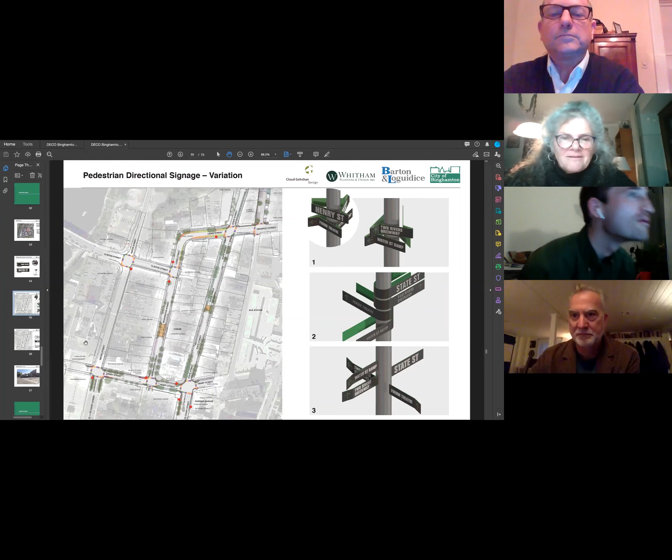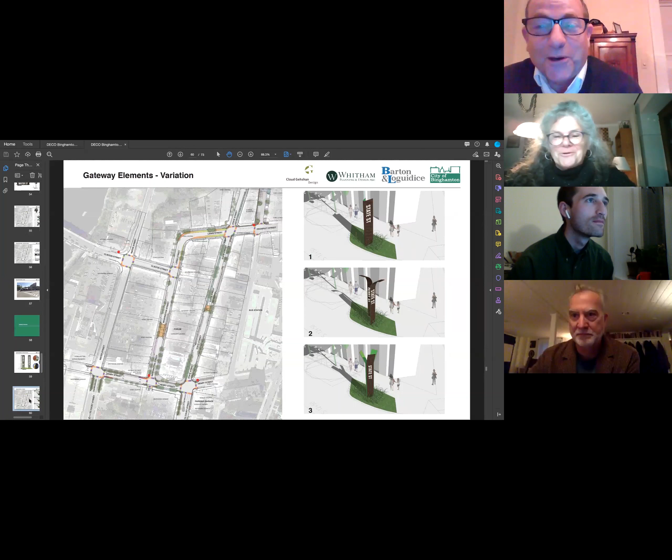I do like the wraparound signs very much, and I like your deco signs on the green grass or whatever green you have. I think you're going to find, I know for a fact, there's a lot of dog owners in these apartments, and it's quite dense with dogs. I'd hate to see it abused. Is there any thought of how to protect some of these green spaces from dogs? In New York City, when I lived there, you used to curb your dog. Nobody curbs their dog anymore, but I don't know. And I don't know if you'd put a dog park or a dog walk spot, but I know my tenants go straight across the street and those trees get peed on 25 times a day. So I don't know what you can do about that.

A couple things. More waste cans downtown would help for people to put their bags in. We did think about dog waste stations, but that seemed a bit too specific when good looking big waste cans could take more than just that. But we did think about it.

In terms of the plantings, it helps to have spaces that are a little more difficult for a dog to get into, because they will walk right onto the lawn and go right to the tree because that is easiest. So something a little thicker, and there's nothing stopping private owners from putting little signs to the effect of curb your dog. We haven't, but I think it's a good thing to keep thinking about as we look at the design.

But there's also a balance to strike between trusting people to do the right thing. Dogs came up in the survey quite a bit. Your dog. No, right. I like the street signs, by the way, too. They look, I think there's an interesting thing, they stick out and they do tie into the wayfinding. It's a great idea.

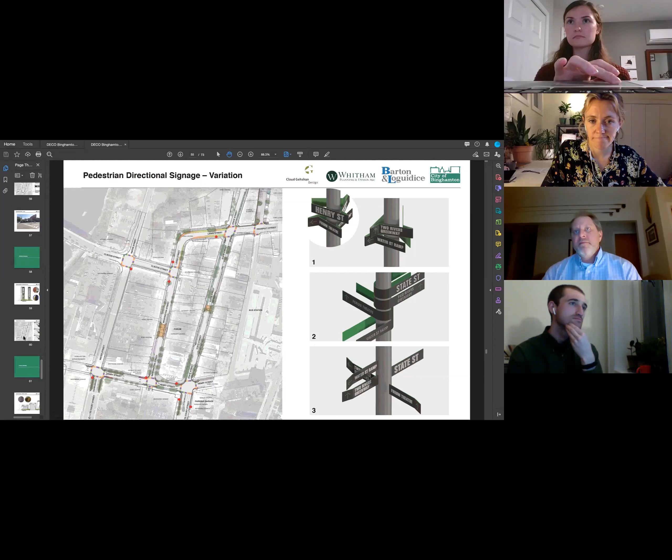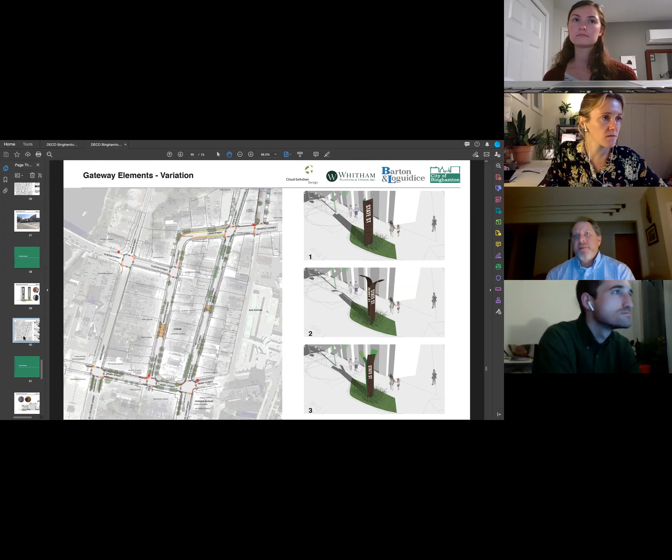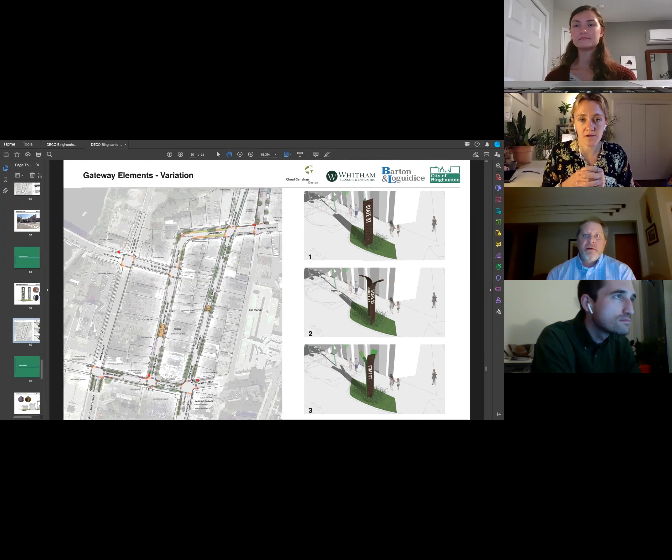We've got these different options also for the gateway fixtures. These are kind of these larger than life elements that are at the periphery, and there's an in-ground light, as Barb was explaining, that could be programmed to be different colors, and that would shine through the perforated metal. I like the first one, but they're all nice.

And the last piece, that was more of this custom art signage, were the screens. So these are at the median, near the State Street garage, near the Riverwalk, and they would be infill panels to a fence. It's actually one of the only fences in the area, on State Street.

I didn't understand those. Where is that? What is it? What's its function? Are they just purely art? They're purely art. They are kind of announcing that you're here. They're an interesting way to infill things that have to be there anyway, like the median right now has to be there for traffic, and the fence has to be there because of the grade change. So it's a way to have fun with it and be sculptural at once. Yeah, okay.

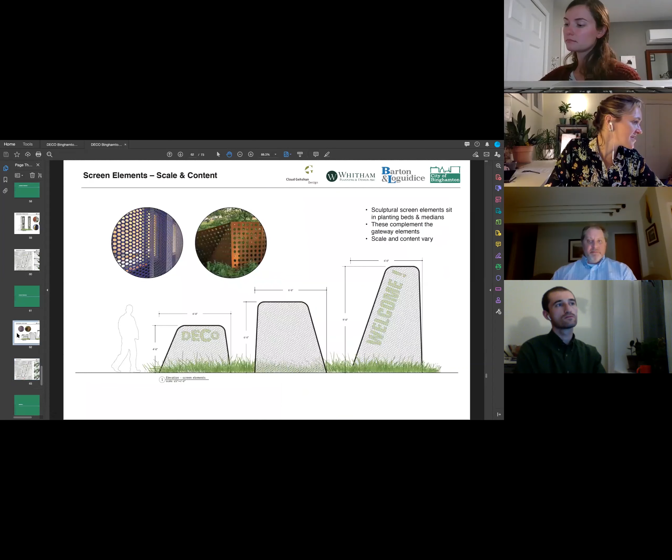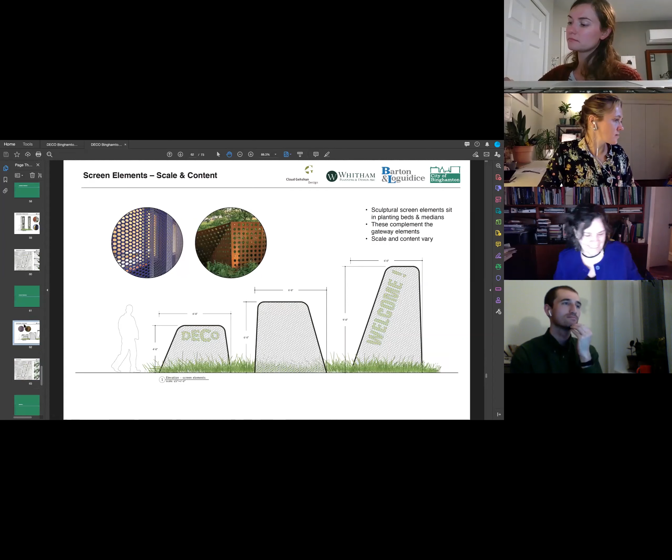Are they going to be black, or is that rust color an option? We are thinking about that. I sort of like the rust with the green. Or could they be done in the form of letters, and that could be your photo, your Instagram location? Interesting idea. Yeah, we could do that one, maybe in a place that would be safe to do it, like near the Riverwalk. You and your bike could pose for a photo. No one wants to see a picture of me, let me assure you.

I think the idea is that these islands, it's sort of the gateway concept that starts and leads you into the district, and we're thinking that we could implement them in a few places. They need to relate to the gateway in some way, so the pattern or the shape, this one was a little bit more of a wave, along Water Street.

I mean State Street, where the canal is. And we have a Water Street, which you might think was the canal, but it was named State Street because they gave the city of Binghamton money to fill in the canal, and so they named it State Street for that reason.

I think it's also about trying to blur the line. One of the things that came up through talking to members of the public was that it's very difficult to try and define edges in a city fabric. It's about extending and blurring the boundary. The street names already exist, and there's no convincing people that it's State Street. So that is exactly part of why we're thinking about the names.